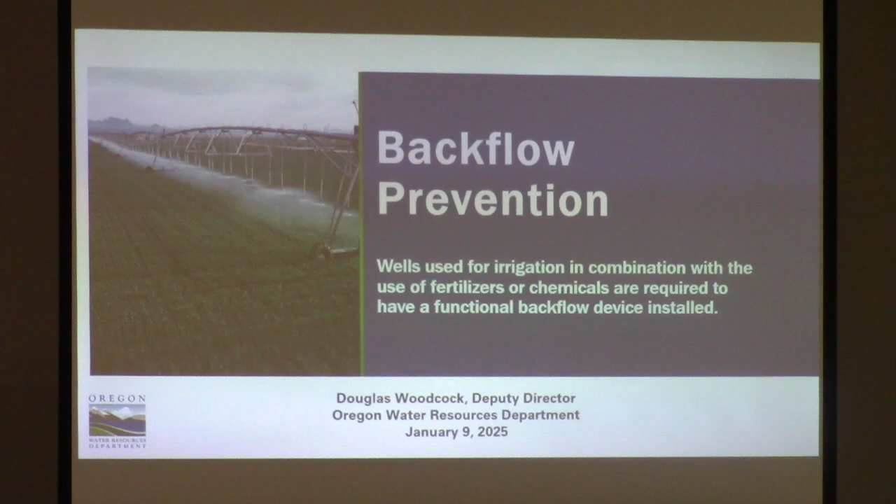We can add a few more. But this is for inspection.

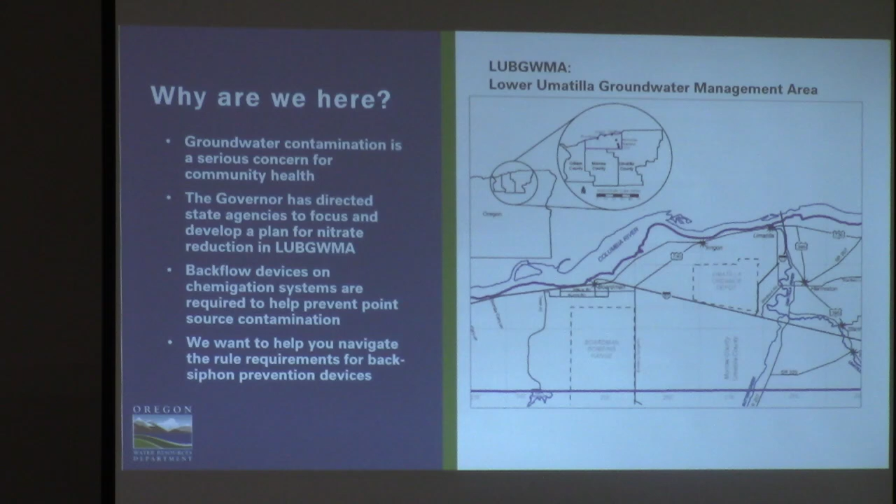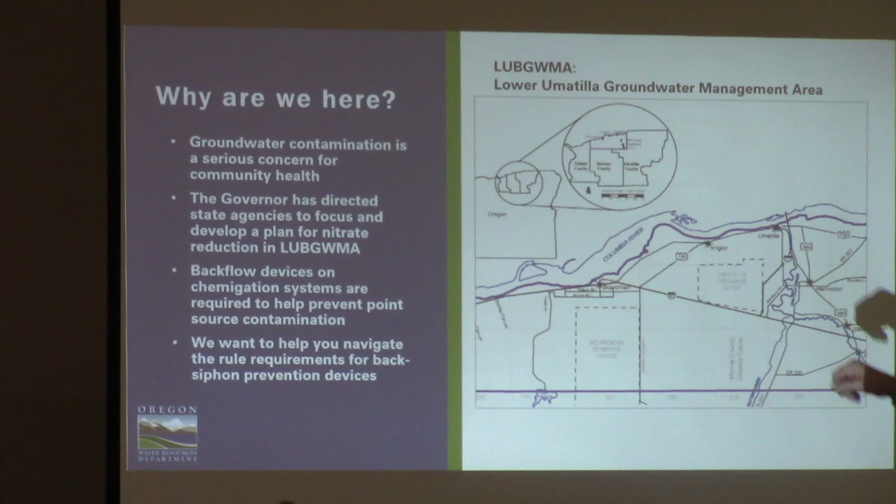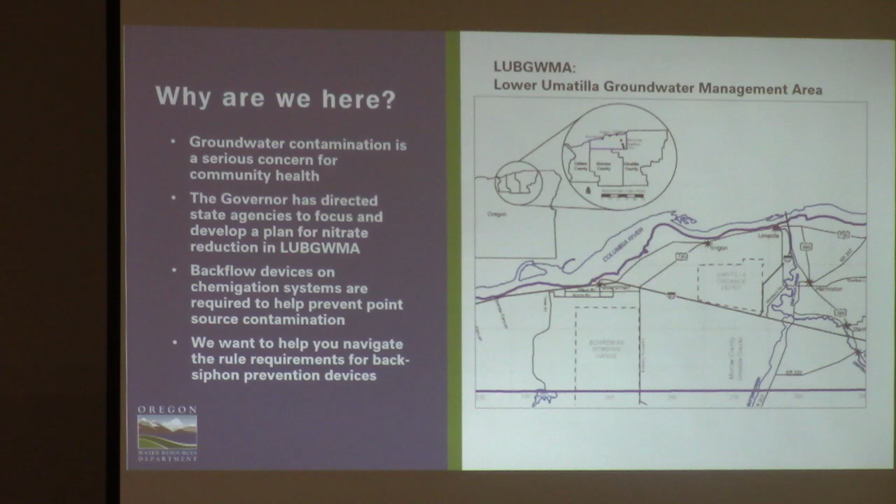So with that, we're going to figure out how to advance. So why are we here? This is the Lower Umatilla Basin groundwater management area, which you're all familiar with. There is a very, very bad groundwater contamination issue here, nitrate problems across the basin. The governor has directed state agencies to reduce nitrate contamination in the Lower Umatilla Basin. So DEQ, ODA, Water Resources Department, and Oregon Health Authority are all working together on this issue. We raised the issue of backflow prevention because wells that are hooked up to a chemigation system, where you're injecting chemicals into your irrigation line and applying that as you irrigate, have the potential of drawing those chemicals down the well when that well gets shut off.

And so there is a requirement that backflow prevention equipment be installed on the irrigation system to prevent that unintended movement of water back down the well. Now I'll say a little something right here. We had a gentleman and his son come in a little earlier and say, I irrigate from my domestic well and I don't chemigate, I don't inject any chemicals into my irrigation line, do I need backflow prevention? The answer is no, you don't. So if you're not chemigating, then this equipment is not necessary. I just want to get that out there right now. He thanked us, took a cookie, and left.

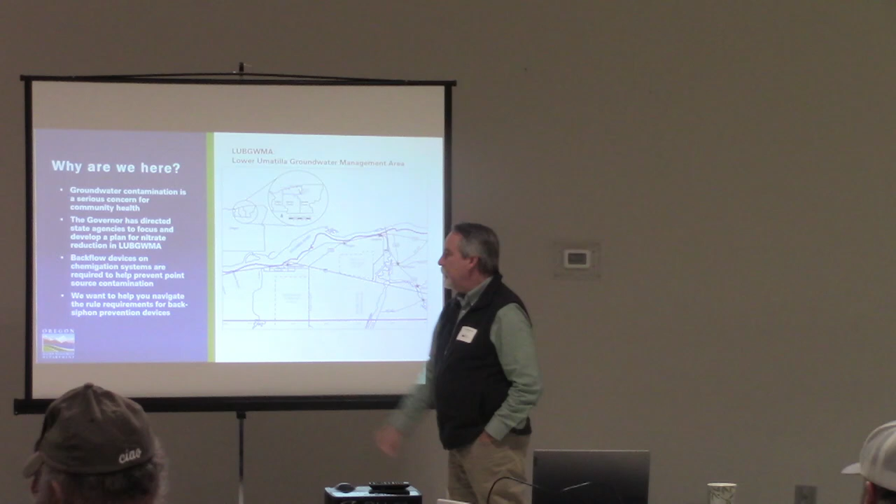So as I pointed out, backflow devices are required on chemigation systems. And lastly, while we're here, we want to help you navigate the rules, because I don't want anybody to have to sit down and decipher the Oregon Water Resources Department backflow device rules

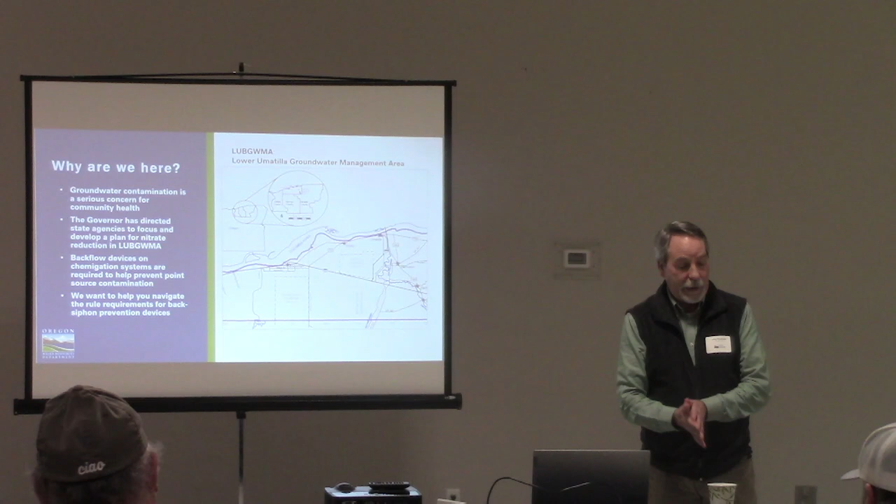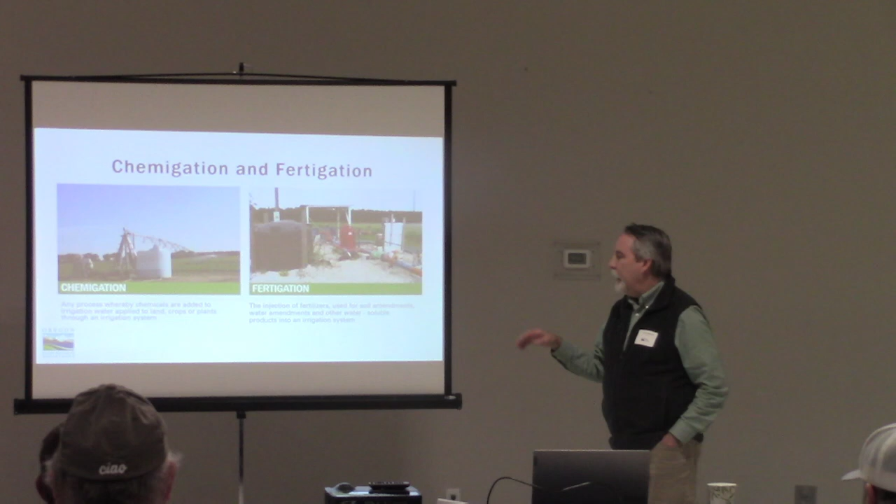and try to understand them cold, because they can be complicated. So with that, I want to define some terms for us here. You'll hear me bounce back and forth using the term chemigation and fertigation. Fertigation is kind of a subset of chemigation. Chemigation is injecting chemicals into your irrigation system, and fertigation is a more specialized term, where you're injecting fertilizers into your irrigation main line. I use them somewhat interchangeably, but chemigation is the more common term that I would use. So don't get hung up on the words too much there.

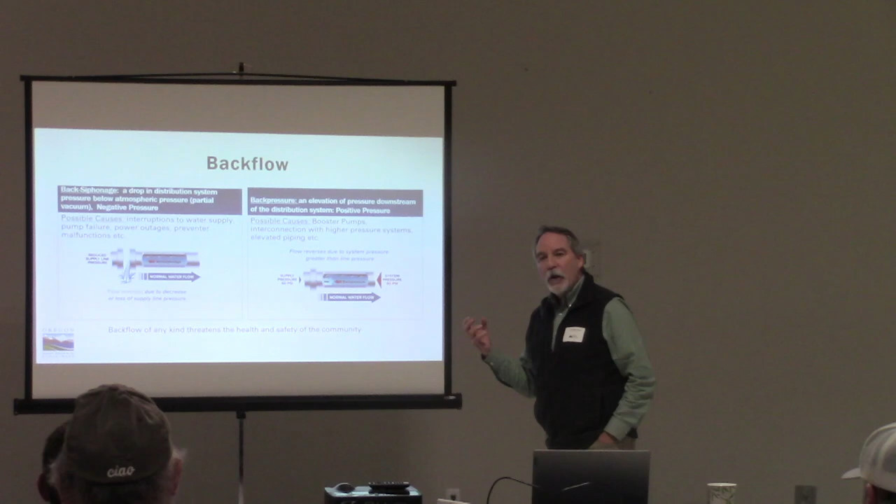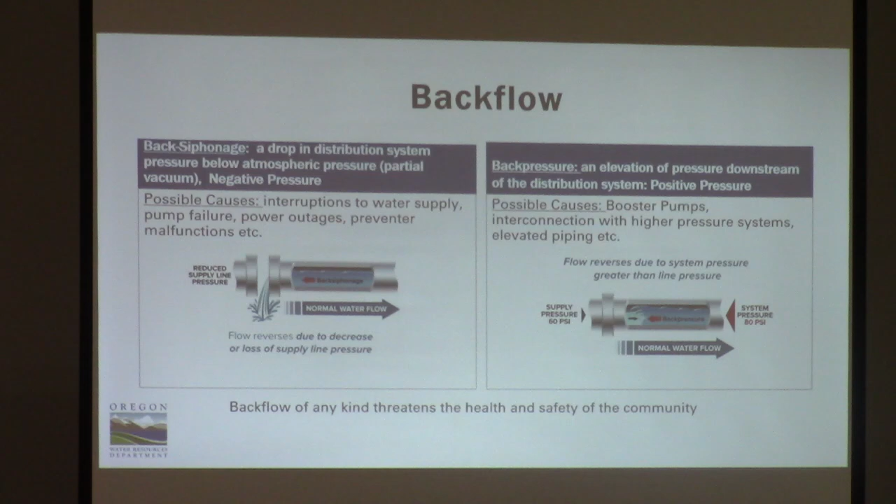Backflow is that unintended flow of water upstream through your irrigation system. So possible issues: back siphonage, that's where a siphon actually gets set up and it draws that water backwards in the irrigation system and then back down into the well itself. And there's equipment to help prevent that. And then back pressure. You could look at an elevation system where you've got more pressure at the end of your irrigation system than at your well, and it's pushing that water in the wrong direction.

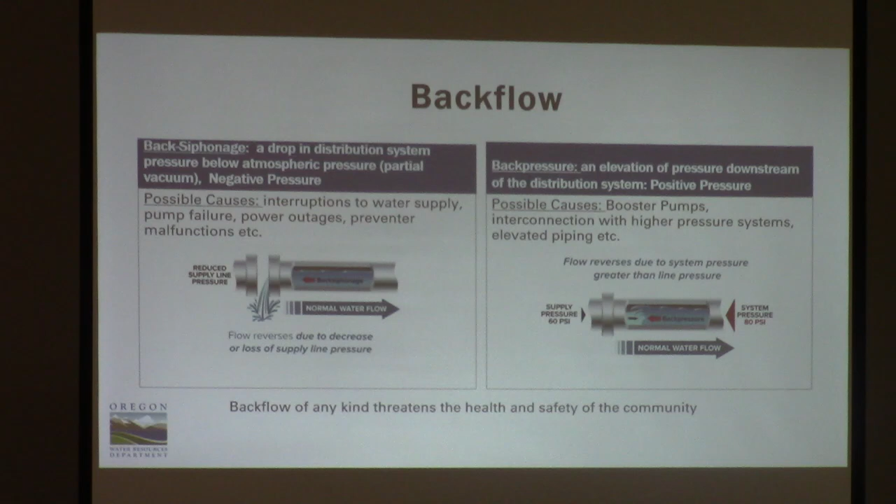Touch just a little bit on the law. So these rules have been on the books since the mid-1990s. A lot of people have this equipment on their wells, and many don't. We've taken some phone calls of late that indicate that some folks aren't aware of backflow prevention and don't have this equipment. So this is why we're here. We just want to be able to talk you through what the equipment is and why it's necessary.

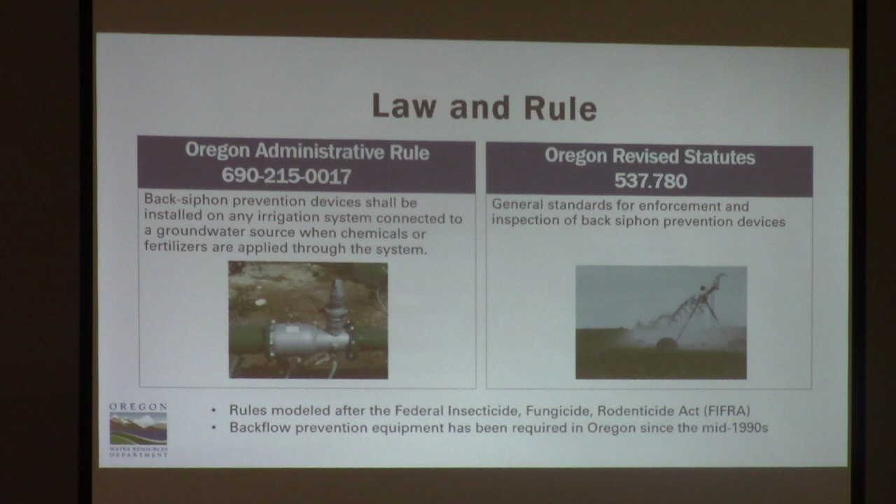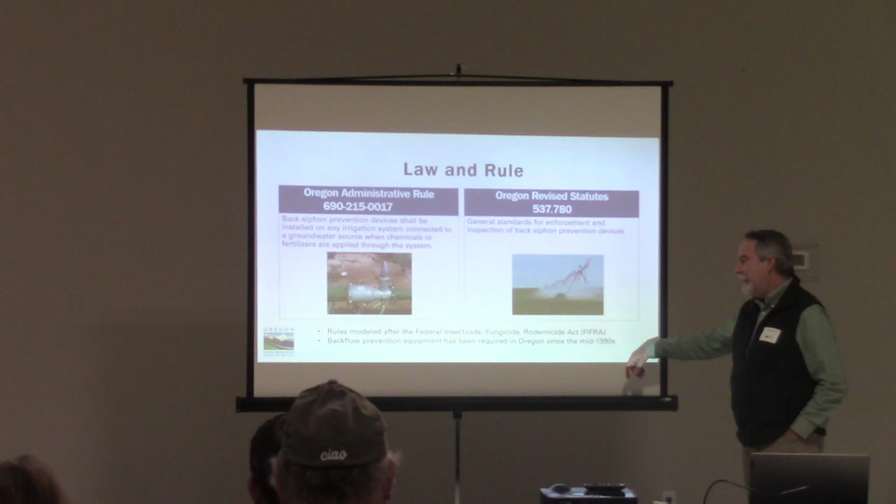I'll just touch on the left there: Oregon Administrative Rule says back siphon prevention devices shall be installed on any irrigation system connected to a groundwater source when chemicals or fertilizers are applied through the system. That rule is basically spelling out the authority provided under the revised statutes, and those are just general standards for the enforcement and inspection of back siphon prevention devices. These rules, by the way, were modeled after the Federal Insecticide, Fungicide, Rodenticide Act, some may have heard of it referred to as FIFRA. And like I mentioned, these rules have been in place since the mid-90s.

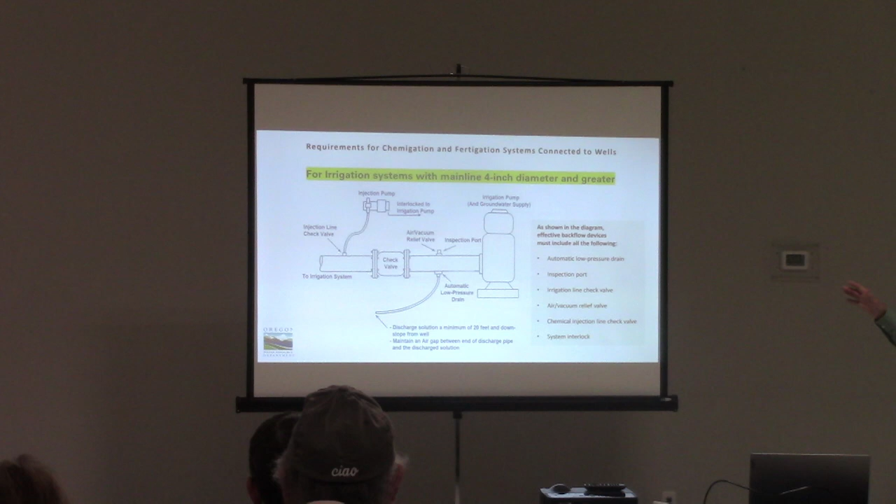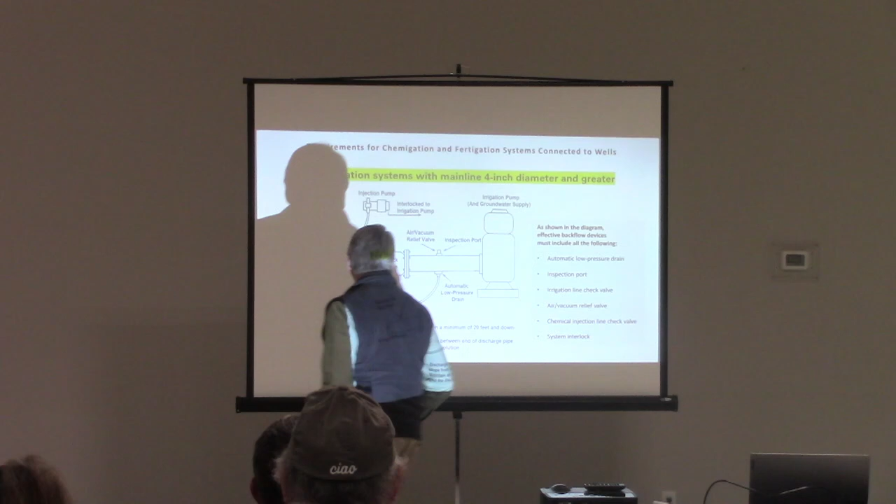This is a very, very simplified system. Many of the irrigation systems out there are much more complicated than this, but we're going to keep it simple for now. I'm going to start downstream, so here's the pump right here. Water is flowing this direction. So starting downstream, down at this end, the first thing we have is an injection line check valve.

That check valve is there to prevent the unintended movement of fluid one way or the other. You don't want your irrigation water flowing up through your injection pump and into your chemical tank. So that check valve prevents that movement of the water, and also prevents the unintended discharge of this chemical water in the event of a pump shutdown, so you don't have that drainage from the chemigation or injection pump into the irrigation main line.

And this has to be downstream of the next item, which is the check valve. Oh, first, I want to point out that up here with the injection pump, that needs to be interlocked. Here we say it's interlocked to the pump, so in the event that your groundwater supply pump shuts down abruptly, this automatically turns off. That interlock automatically shuts off that pump and prevents the continued injection of chemicals into the irrigation main line when you don't want it.

More complicated systems where you've got many wells, all manifolded together and then going out to multiple center pivots, may be a little different configuration than we've drawn here. Again, this is a simplified diagram to explain the different components of back siphon prevention. The next item upstream is the check valve. This just needs to be present for irrigation systems with a main line of 4 inches or greater. There's 2 different standards here; this is for the larger system.

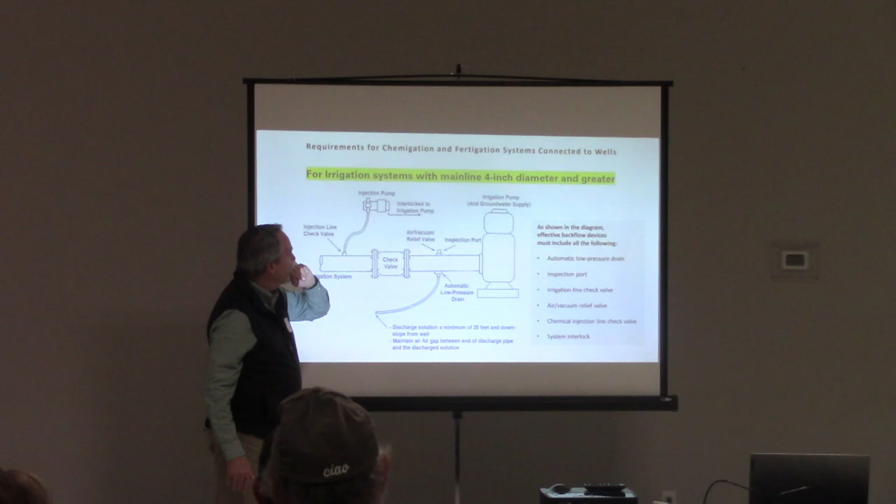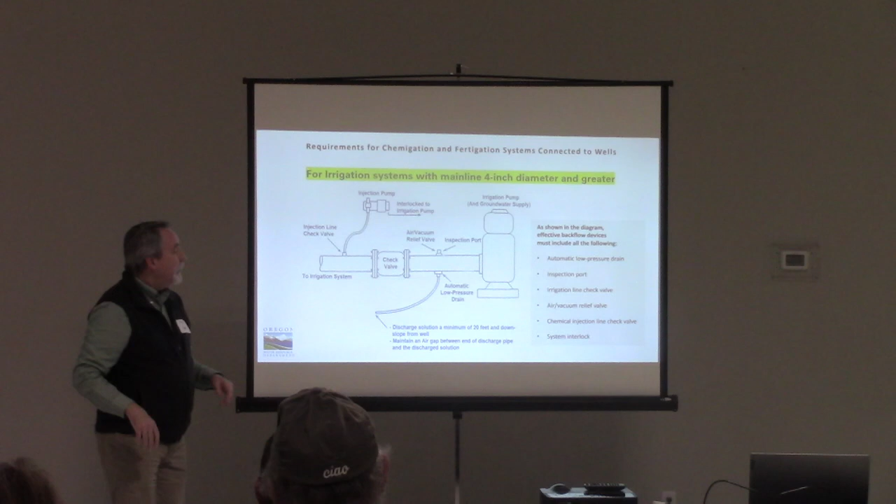There's an inspection port also. Some of you, if you had a chance to meet with the vendors back there, they've got some equipment that shows where that inspection port sits. That inspection port and air vacuum relief sits directly above the automatic low pressure drain.

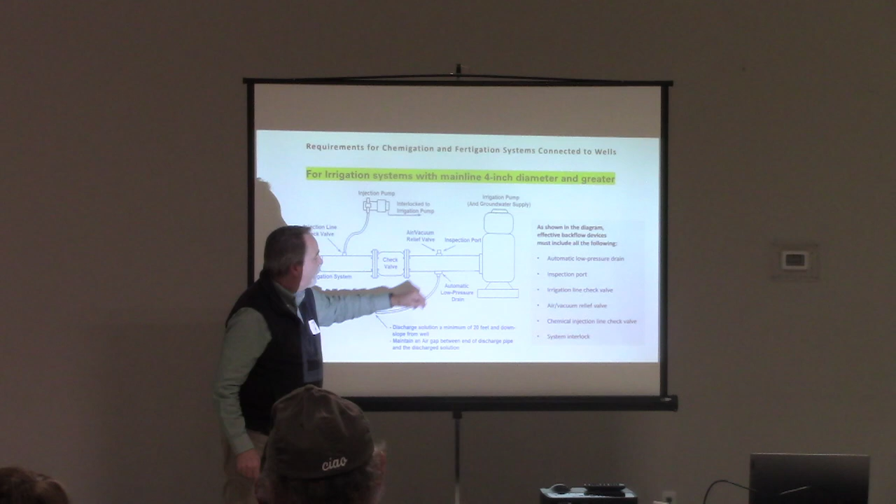Automatic low pressure drain is a valve that under pressure closes so that the water flows through the system. When the pressure is reduced, that valve opens up and allows the incidental water that is pooled up, because the pump is shut off, the valve is closed, there's still fluid in there, it's going to drain that fluid away before it flows back down the well.

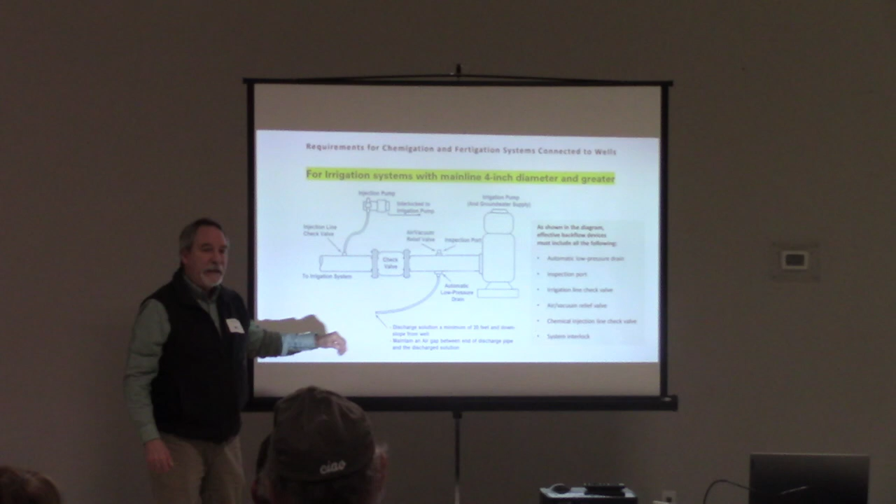Again, all of this is intended to prevent that contaminated or potentially contaminated water from flowing back down into the well. This automatic low pressure drain has a hose on it. That hose is supposed to run a minimum of 20 feet downhill away from your well, and it needs to have an air gap at the end so that if a vacuum is set up, there's no opportunity for this hose to act as a conduit for fluid to be drawn back up into the well.

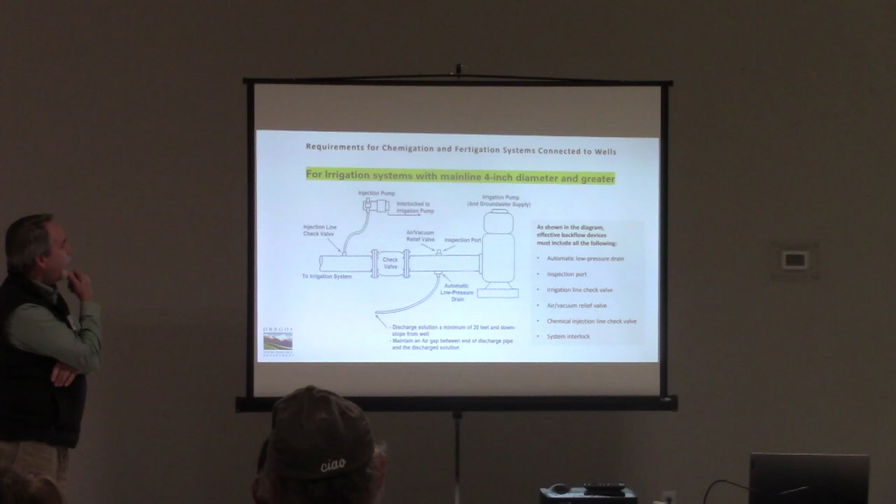I think that does it for this. I'm going to stop there and ask if anybody has a question before I show the next size of these.

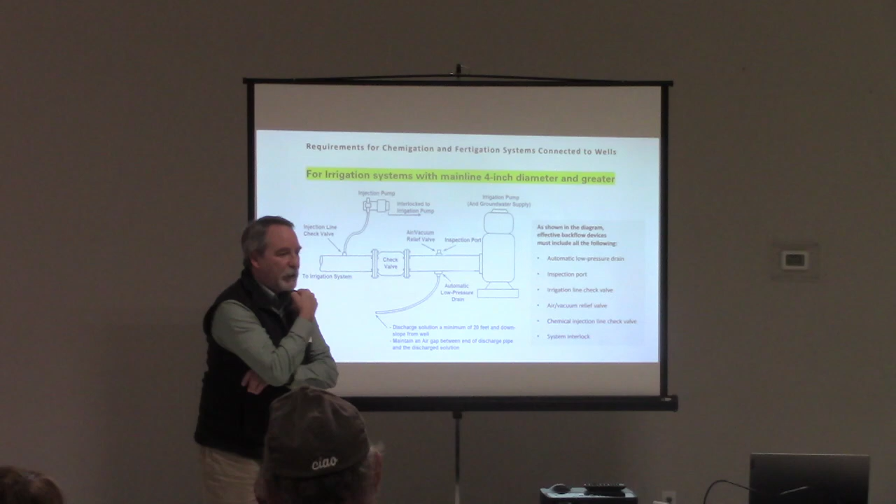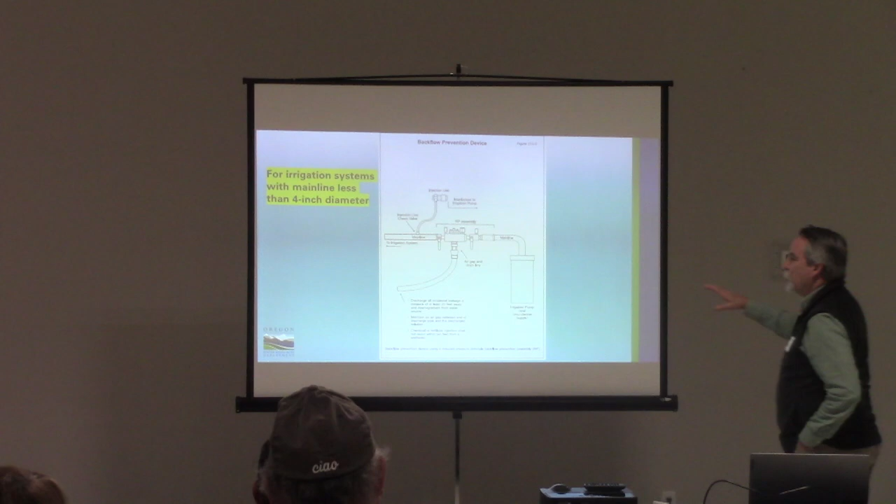So this is a system set up for 4 inches or larger. This is the requirement, I'm sorry, it's a little bit small, for irrigation systems with a main line of less than 4 inches.

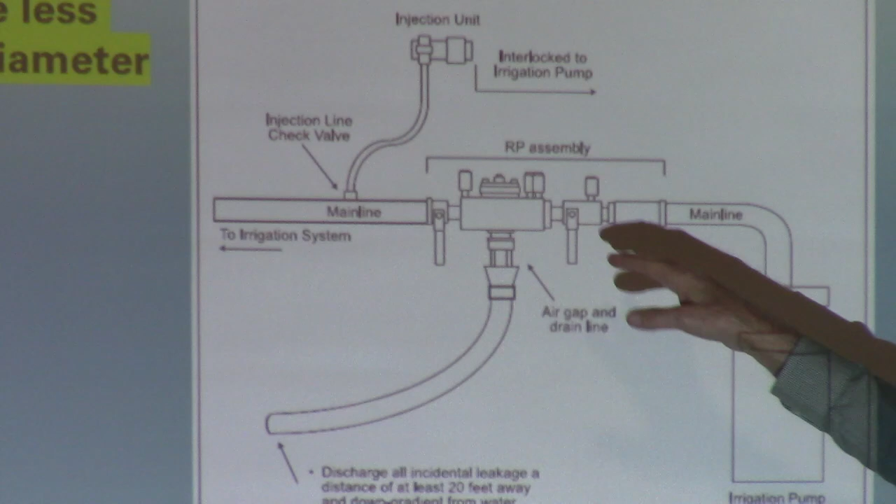All of the same components. Injection line, check valve, interlock to your pump. You've got your drain, your low pressure drain, and hose. But here, rather than a single check valve, the requirement is a double check valve called a reduced pressure assembly, an RP assembly. So it's just a little bit different to the system, but all of the same essential components are in it.

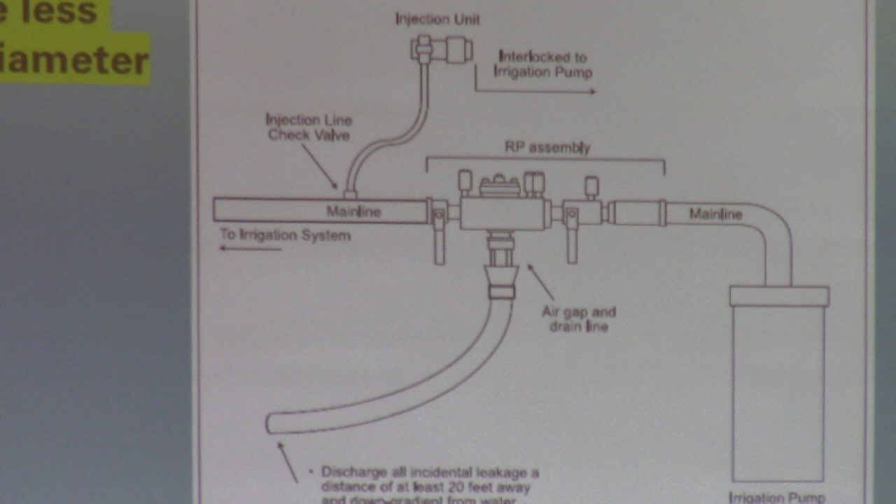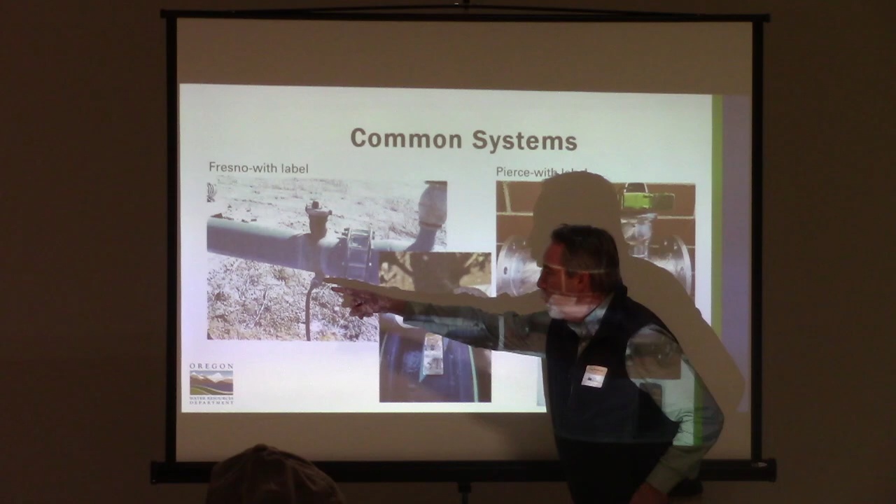On this side, we've got this happens to be a Pierce brand system, like you see on the back table there. We really like these because almost all of the components are in one device.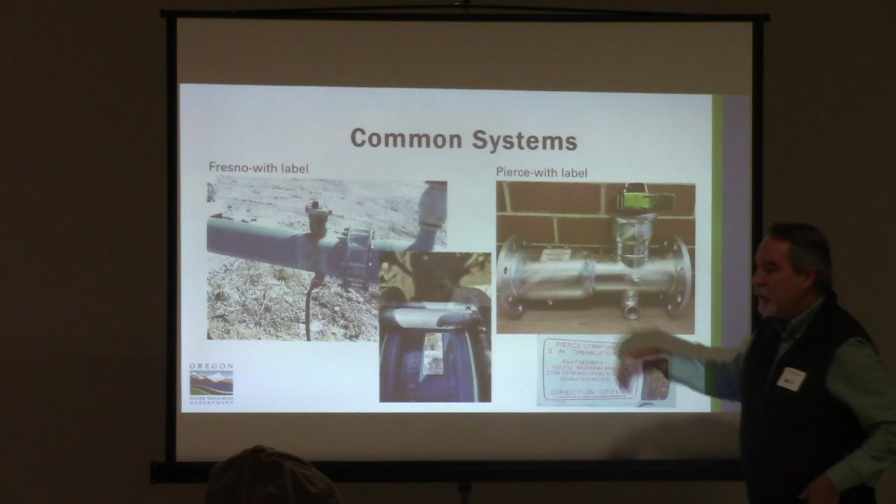You've got your air vacuum relief. You pop off that lock on top. You've got your inspection port directly over your low pressure drain right here. You can put a pressure gauge on if you need to right there. And you've got your check valve here. So it's just all in one system, and we approve of that design.

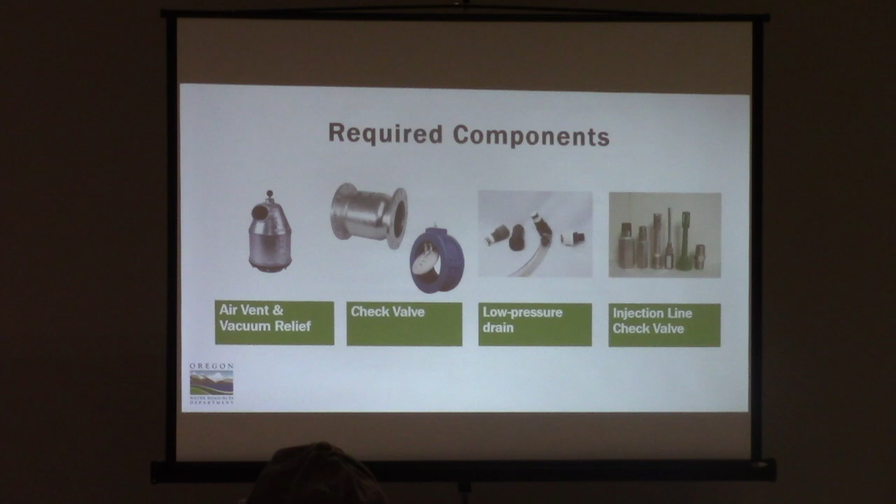Again, set components, air vacuum, got our check valves, got our low pressure drain here, and your injection line valves that I was pointing out.

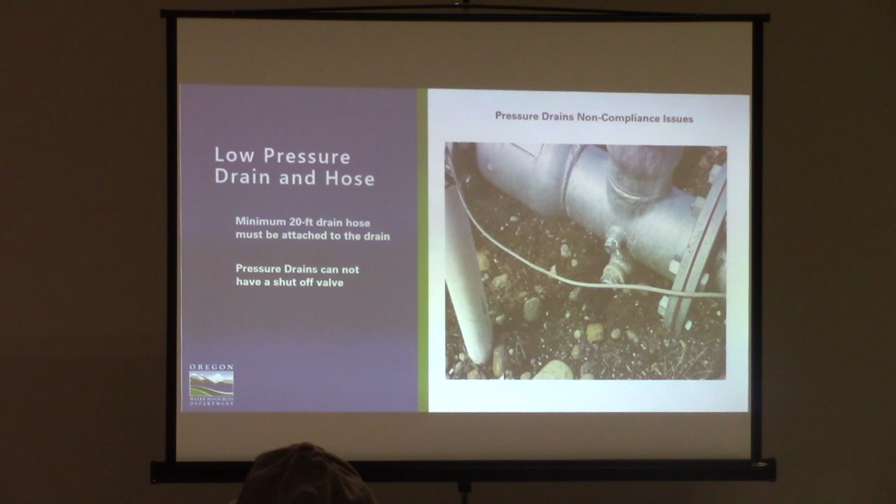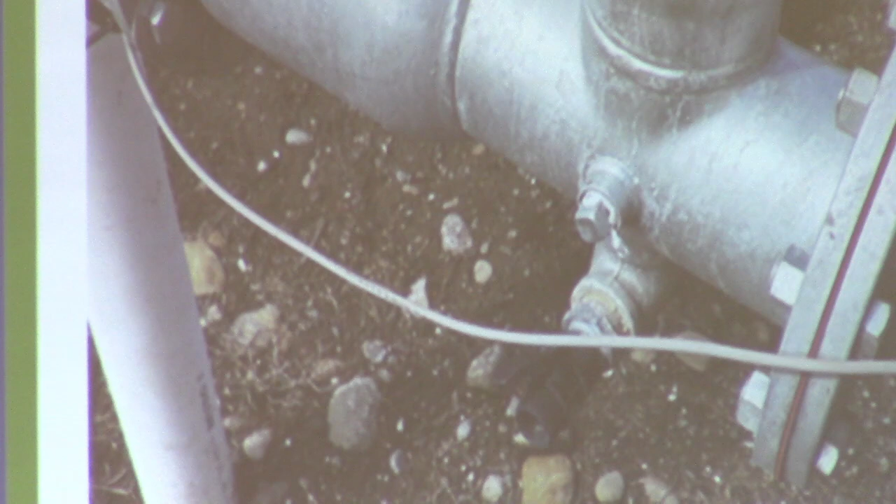This picture didn't come through quite like I had hoped, but this is a picture of the low pressure drain. It's got a couple of problems with it. One, there's no hose. You should have a hose that discharges that fluid away from your well. And secondly, you can't quite see it, but right on top of this nipple here, right on top, there's a handle.

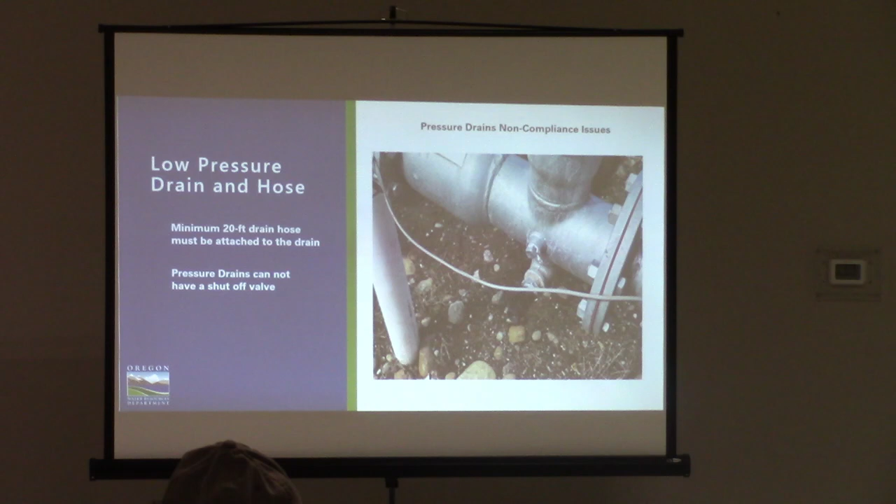It's a shutoff handle. And that's a requirement for the low pressure drain. You cannot have a shutoff anywhere along that line. Not on the valve itself, not anywhere along that discharge line.

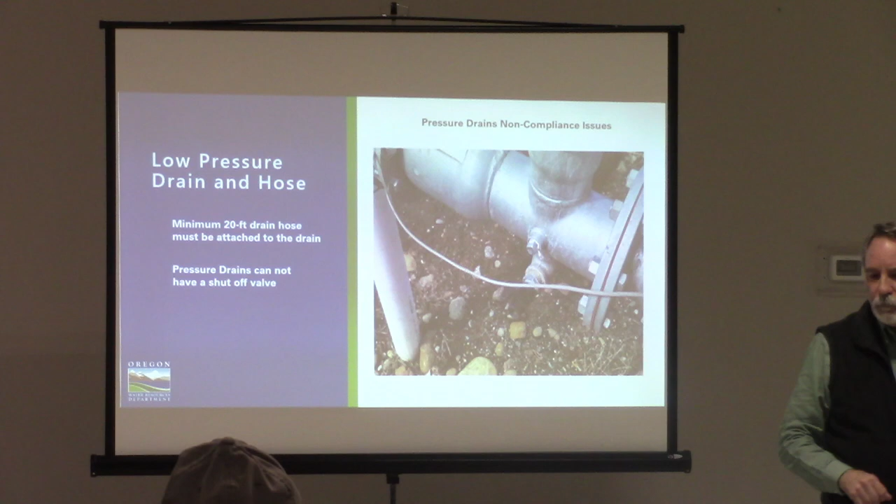So I want to talk just a moment here about our compliance inspections. As part of Water Resources Department's effort to work on nitrate reduction in the lower Umatilla Basin, we are going to be out meeting with people and inspecting to make sure that where chemigation is taking place, the proper equipment is in place.

So we'll be out looking at just the status of the chemigation. Is chemigation occurring or not? What equipment is there? Backflow system setup. And we'll be looking at the backflow and where it is relative to your pump. So we just want to make sure that we've got all the right equipment in the right place, and that equipment would be effective in preventing backflow down the well.

On the compliance piece, we go out there and if you've got all the equipment in place and everything looks good, no further action is taken. Everything stops right there. When we get out and see that the equipment is not there or it's not in proper working order...

we're going to try to meet with the owner or the operator and let them know that equipment needs to be replaced or installed. If there is a refusal or a lack of compliance, we will pursue enforcement. That would be a notice of violation and a notice of assessment, which basically leads to civil penalties. We don't want to go there. We're hoping that when we meet with the landowner and they recognize they don't have the appropriate equipment, that equipment will be installed.

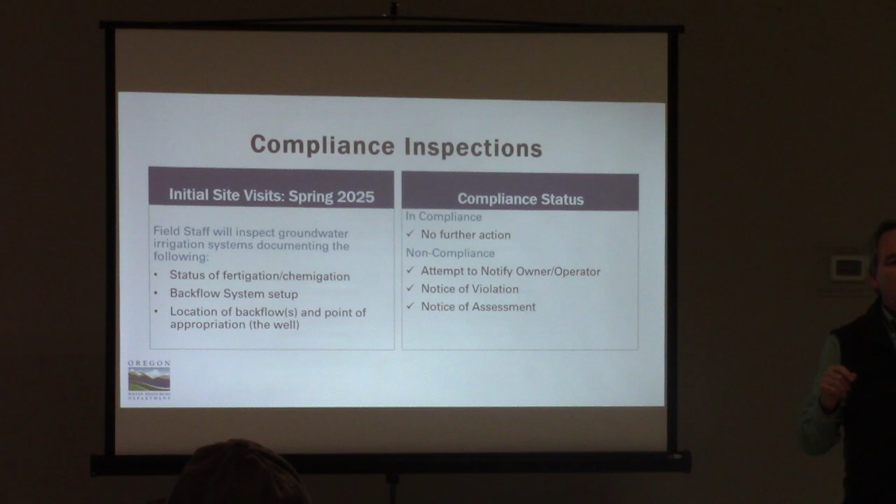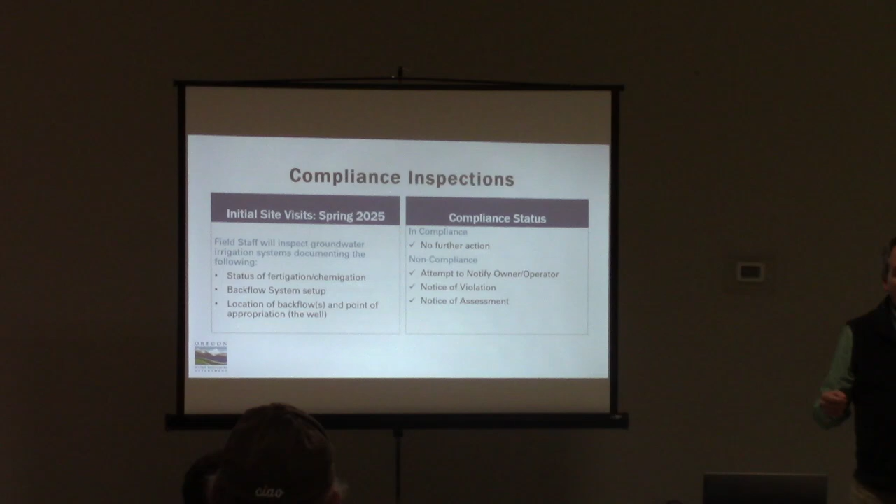One other important point: the way the rules are structured, if you are chemigating and you don't have the proper back siphon prevention equipment in place, then you are out of compliance. To be in compliance, you disconnect the chemigation. You just stop fertilizing through your system at that point, and that buys time for the landowner or operator to get the appropriate equipment in place.

If we come out and say you don't have the equipment in place, would you please disconnect your chemigation, and you do, we're done. Don't hook it back up until you get this stuff in place, but that gives you the opportunity to get one of those Pierce devices installed and make sure you've got the proper equipment for back siphon prevention. That's how our staff will address this when they see that you or the landowner doesn't have the right equipment. They'll ask you just to stop chemigating, and as far as we're concerned, you're in compliance.

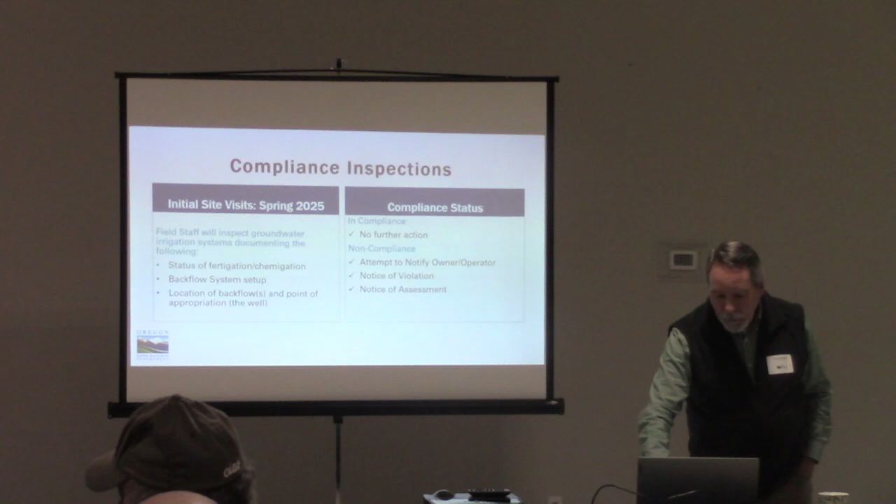I want to share with you just a few resources. I hope you noticed on the table when you first came in, we had some copies of documents. The first one listed is 'Chemigation in the Pacific Northwest.' There is a lot of good information in this document. It's more than just the back siphon prevention equipment—it also talks about the appropriate ways to calculate your chemigation so you're getting the right application of chemicals.

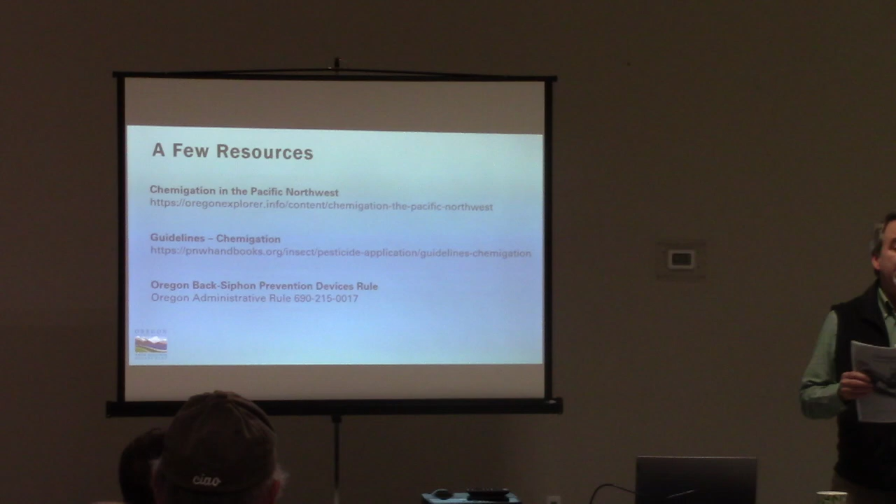The lead author happened to be on the Rules Advisory Committee in the mid-90s when the Oregon Water Resources Department back siphon prevention rules were adopted, and really provided a lot of help in developing those rules. We've got another document here, guidelines to chemigation, with a lot of good information in it.

And then lastly, we also made copies of the rules if anybody wants to sit down and spend some time looking at what the requirements are. So with that, I think let's take some questions. I encourage staff to help me out here as we get questions, and we'll take any questions that we have.

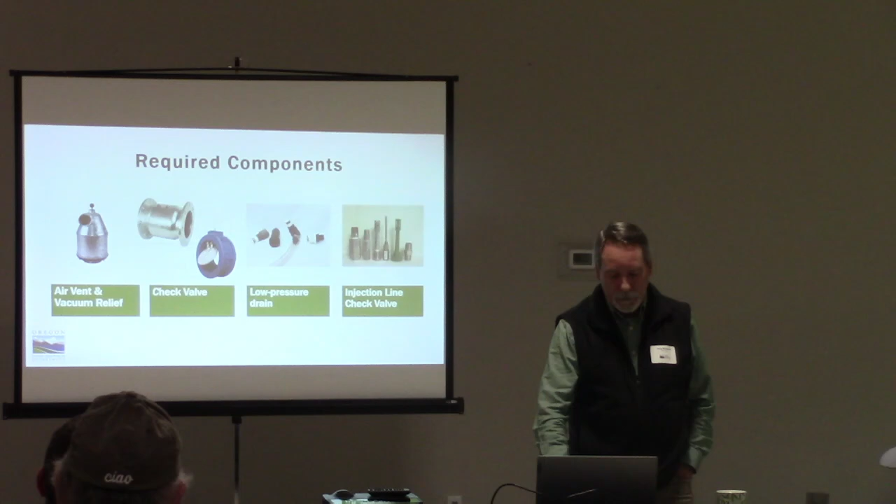Question: So in your large system, what constitutes an inspection? In the large system, as we have it described here, going back to the picture: the inspection port is required so you can make sure that you don't have incidental fluids and that there's proper drainage. It's got to be accessed above that low pressure drain. Question: So is a 1-inch port sufficient, or a 2-inch, or does it have to be 4-inch disconnect, or what constitutes an inspection port? Answer: It's a minimum of a 4-inch access port.

Unless it has written approval from the department. Oh, that's something else I didn't point out.

I did mention that some of these irrigation systems can be pretty complicated, and you can't just get a one-size-fits-all to address all of the backflow prevention requirements. So the director of the department can approve alternate systems, but it requires that you actually reach out to the department and get that approval.

So I think, Sean, correct me, it's got to be in writing? Yeah, the rule says written approval by the department.

If you're just going to grab one of those Pierce systems like our vendor friends have here, those are going to be installed and approved. That's not a problem. But if you're going to do something alternative, contact the department. I don't want you making a big investment in equipment and finding out it's not really meeting the standard. So please reach out to us.

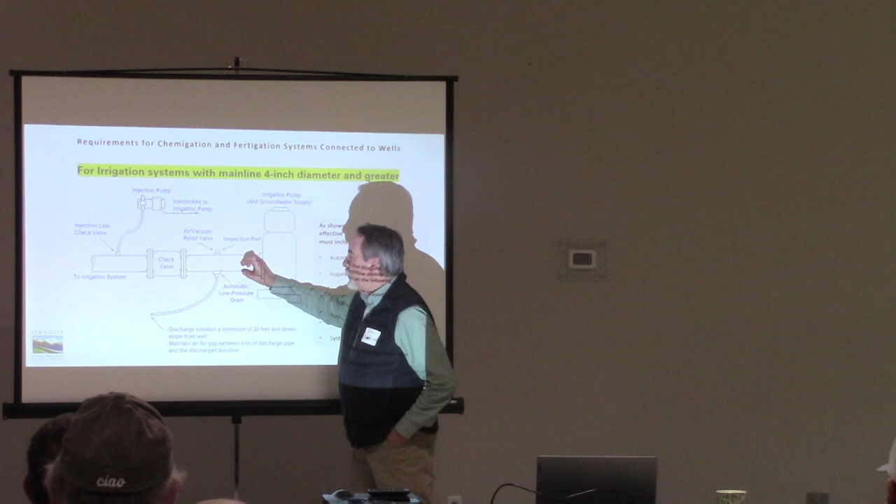This is, we have an automatic low pressure drain here, and that is to essentially eliminate any incidental fluids that are in the pipe behind the check valve.

But it's gonna go down the well. The incidental fluids would go down the well? Yes, they would. So why do you have a drain? You have a drain there because this is potentially contaminated water that you have here. Some water can get past this check valve.

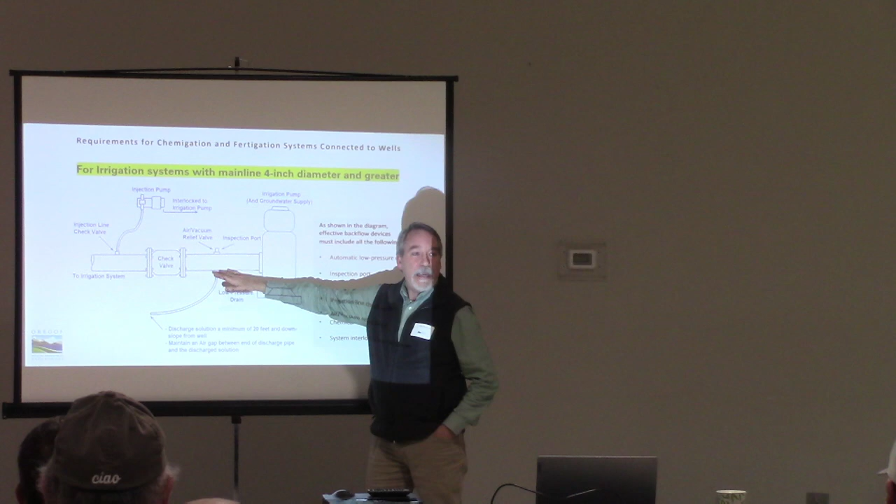When the turbine shuts off, you're going to get flow back down the well. That is correct. But there's going to be some that's captured by this drain and shunted away. So that fluid doesn't go down the well. We're probably talking cups.

Probably cups. You know how many of those I've seen that have been plugged? No, how many? Almost all of them. Because they leak, they don't work. So if you put a cup in for a Fresno check valve up front, all I would have to do is roll a 4-inch coupler on it and put an air vent on it.

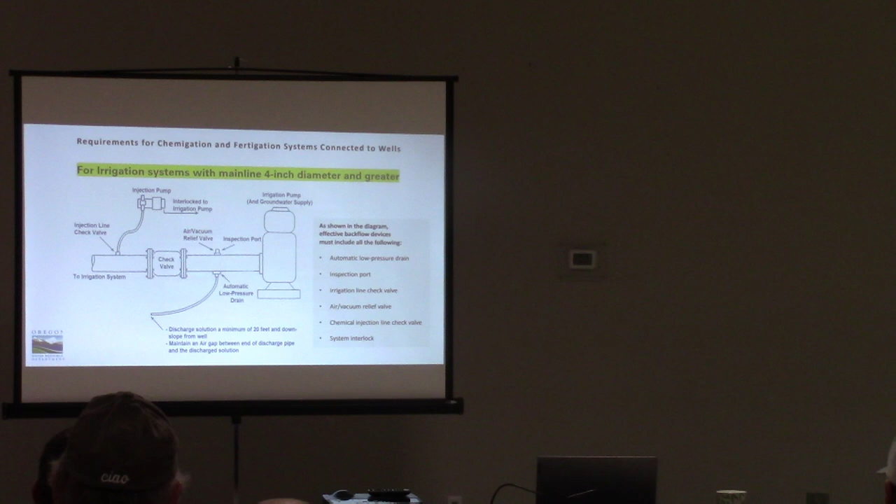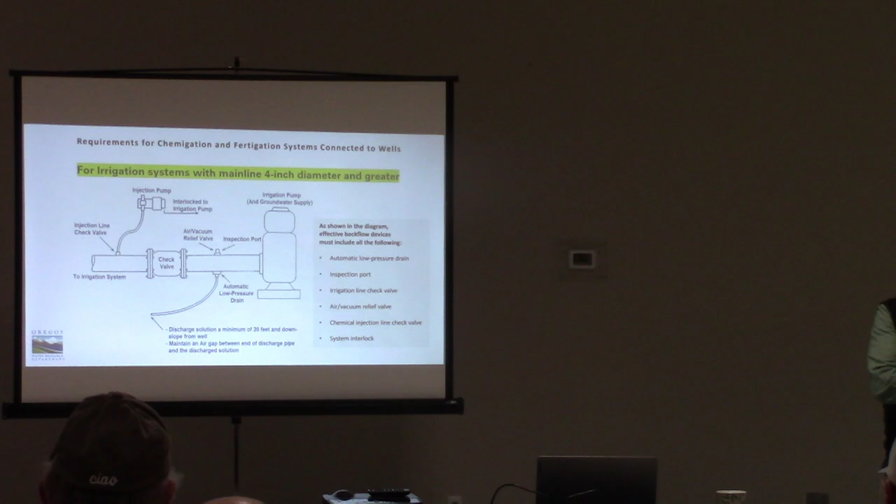So you're saying you don't need the automatic low pressure drain? I guarantee you, once you guys check it, it's gonna get plugged. Once you get the check in, the low pressure drain gets plugged. Low pressure drain is not to be plugged. It's not gonna sit there and leak all over their pump station.

This equipment is not a one and done. I think we agree with that. You put this stuff in, it's gotta be maintained. It's gotta be inspected. You gotta check this stuff.

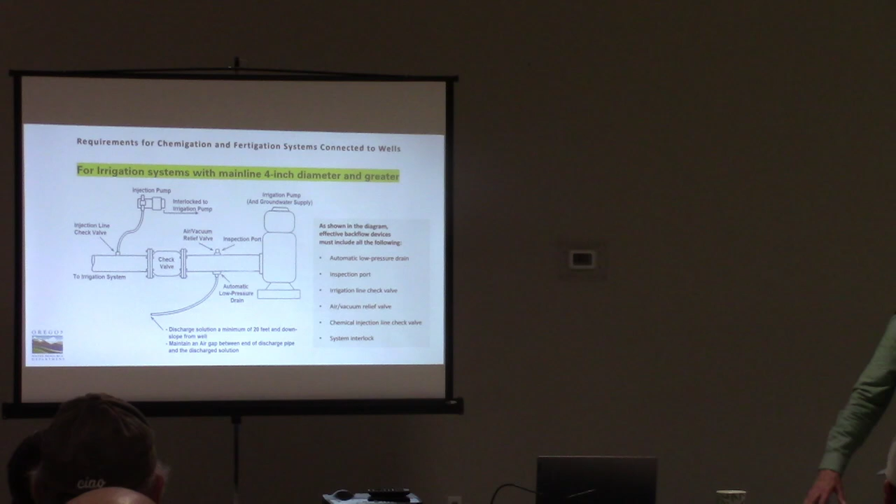Interesting, when we first started developing this outreach program, I reached out to some of the growers and said, hey, we're doing this, we're going to set this up, we're going to start inspecting these. And a couple of pretty good-sized local growers said, you're going to find that most people have these things in place. Some don't. But many of these are going to need to be replaced or updated.

And that kind of falls into your category, I think, that you're pointing out. This equipment can get installed, but it's got to be maintained. So if you've got a plugged drain valve, then that's going to have to be replaced.

I think what you're trying to say is those are problematic because they collect all the rust out along the pipe, and that inhibits correct operation. They tend to leak constantly when the well's in operation, which is why you'll find that when we feed it, probably just the same as you saw that there was a hand valve that was installed.

Yeah, it's exactly, they can be very problematic. That's helpful. Is it rust that typically clogs those? Yes, rust, calcium, sand, rocks that come through your well, debris, all of it.

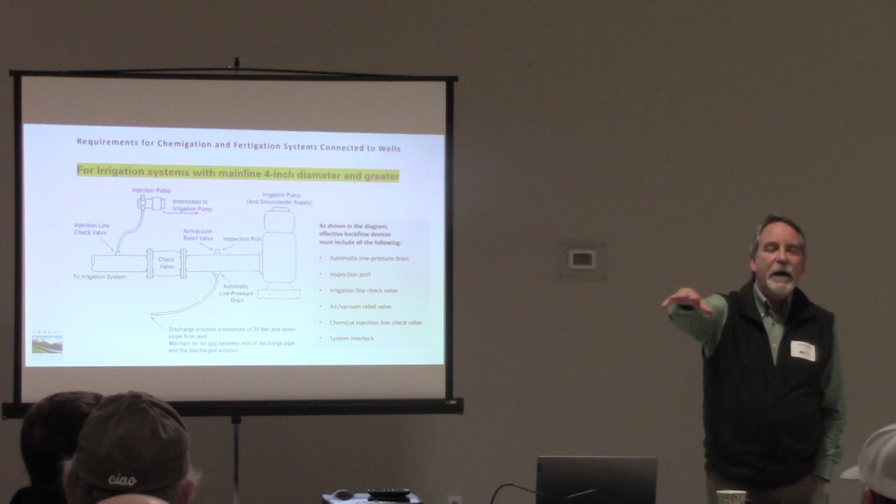Can everybody hear that? Did you hear that okay? Okay, just want to make sure.

Yes sir, on the inspection part of it, is that something that you guys do, or is that going to be for contractors, like water level measurement, the whole thing? Right now, the way that the rules that are in place say, the owner-operator is responsible for inspecting the equipment each year before chemigation begins. So the owner-operator takes a look at that, makes sure it's working. We will be out and inspecting as well.

We have looked at chemigation around the state in individual cases. Our biggest effort in chemigation was really down in southwest Oregon, where we had this huge bloom, no pun intended, of cannabis that was just really growing everywhere. People were taking their domestic wells and injecting chemicals into the irrigation lines, fertilizing their crops with them. So we were working with them to make sure they had backflow prevention on those to protect that drinking water supply. We have not done the type of focused look at backflow prevention like we're telling you we're doing today here in the lower Umatilla Basin.

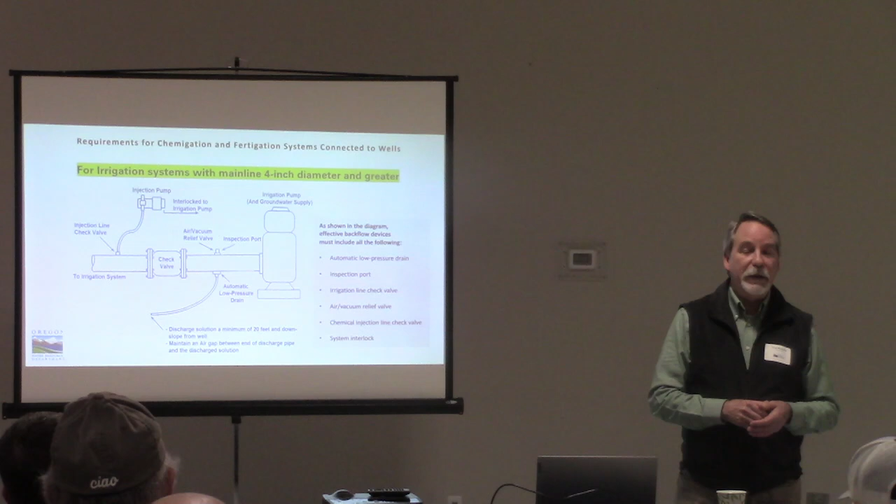So we're going to be out, we're going to be looking at these. The first thing we're going to do is just make sure the equipment is in place. We will develop some sort of inspection program down the road. But right now, this year, before the 2025 chemigation or irrigation season starts, if you're going to be chemigating, get the equipment inspected, get the equipment installed, make sure everything is functional for 2025. And we'll be reaching out to folks to come out and see if the equipment is in place.

Yes sir, do you have a list of either approved devices or specifications for your automatic low pressure drain? As far as how big it has to be, or the pressure at which it seals, or a standard? Sean, do you recall what the pressure says, or what the size? It's 1 PSI, that's when it needs to trigger, but in terms of the size, it's just a 3/4 inch diameter. Okay, so 3/4 inch. I don't know that we have a list of manufacturers. Yeah, there's several you can find online. They're about $20 to replace one of those. You can shop around at different ones.

Or contact the ones that we have, like Pierce. They actually had some of these on Pierce's website. Well, that's a helpful point. I'm glad you raised that about the low pressure drain, because it sounds like that can be problematic, and that's something we can pay attention to when we come out and look at those things.

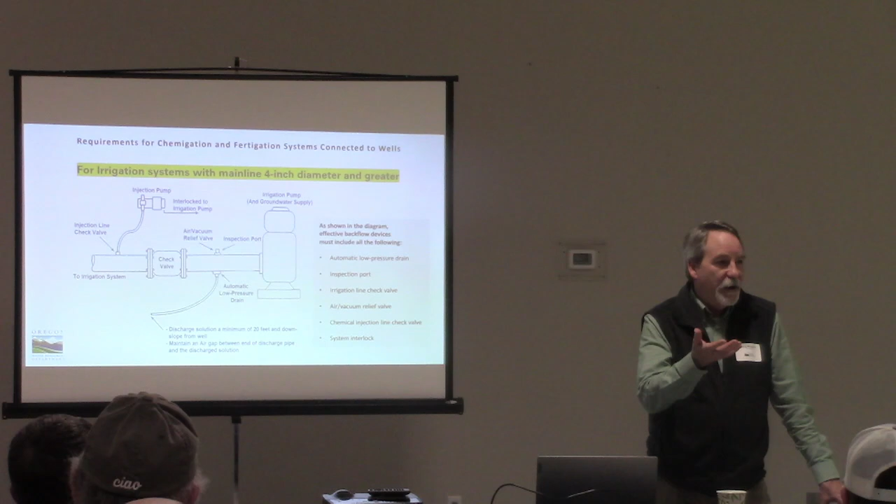You're only requiring this on wells, you're not requiring this on ditch. That is correct. What about sumps? The rules we're talking about are groundwater related. So if your sump is just an excavation in the earth that has groundwater seeping into the bottom of it, that would constitute a well, and so that would fall under this as well. I said well twice, didn't I?

So back to your inspection port, did it need to be a 4-inch coupler? Yes. And reduced down to a 2-inch air vent? I think so, yeah, as long as you can see the check valve from the inspection port. Right, so it could be a Fresno or a Tuscan check valve, or another check valve, wafer check. Oh, wafer check, as long as it also has that air vacuum relief valve.

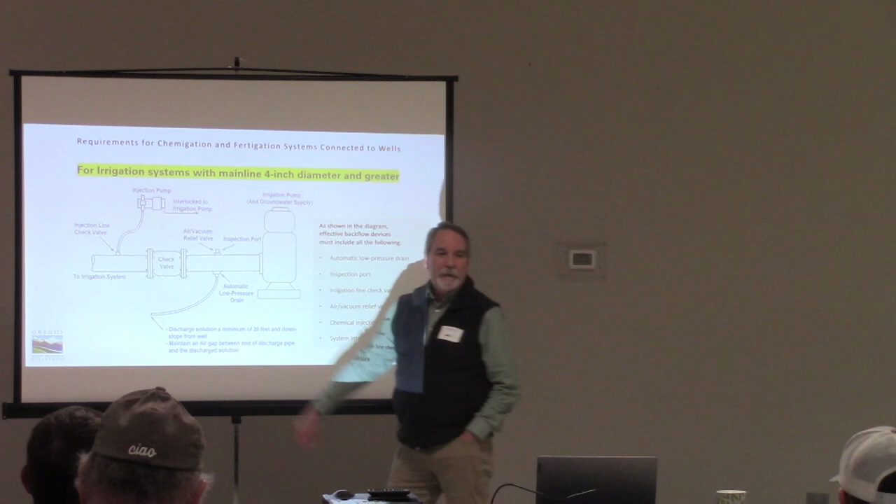Well, with it, most of them have that. I mean, 90% of your wells already have a check valve, or 100% have a check valve, because number one, they're on multiple systems, and that farmer's gonna know if that check valve's not working, and he's losing water, he's not gonna like it. So he's gonna have that check valve inspected and shut off. When that turbine shuts down, all that air vent really does is release air back down into that turbine to let the water stream out.

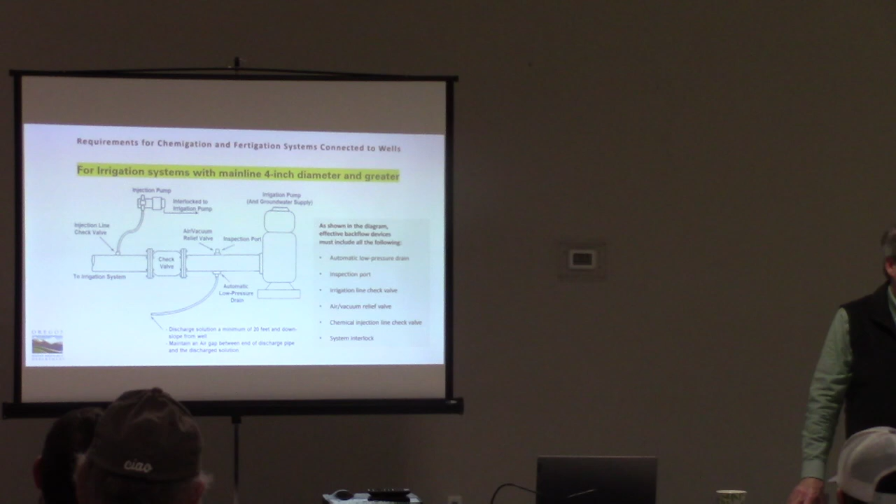Sumps are different. On a centrifugal system, you're not gonna find anybody that's gonna put a drain on the bottom, like on a sump or anything like that, or even on a 20-foot well, because they want it to keep prime. So I'm just saying, once you guys inspect everything, and I already talked to you, there's no incentive to any farmer.

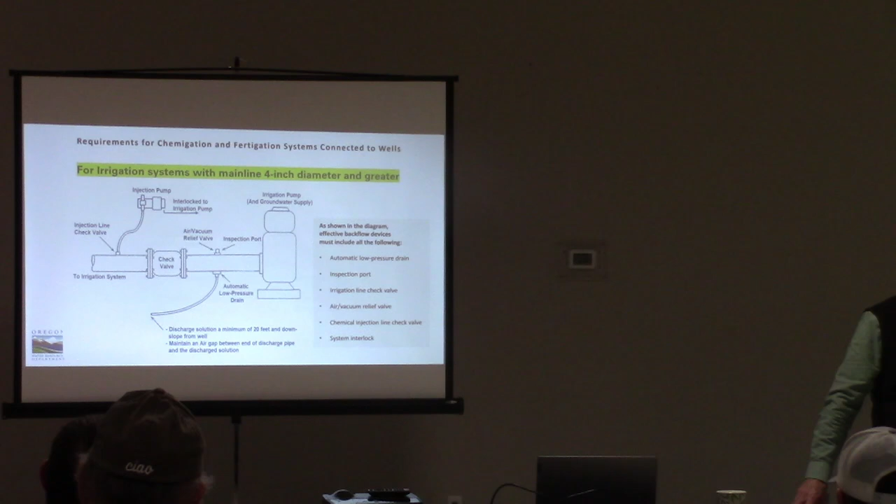It's not that these guys caused it, but now they've got to pay for it. And there's no incentive, so once you leave, that drain's gonna get plugged again. They just spent a bunch of money for someone to weld a coupler on, and those Pierce irrigation valves wear out. They're very expensive, and they don't go up to 14 or 16 inch. So what do you do then?

Well, in these situations that aren't straightforward, where you can't just buy something off the shelf, I want to work with you, and with people who are knowledgeable about this, to find equipment that will be effective in preventing the backflow.

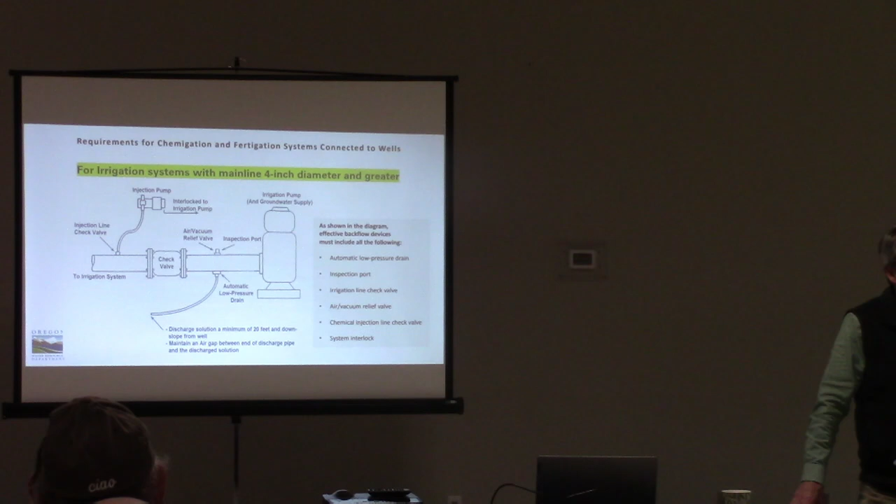Another question for you. In the paperwork we received, there was a question about when the backflow system was last tested. What is the test requirement? Is that different than just a regular inspection? Right now, as the rules point out, the landowner or operator is responsible for inspecting and testing the device.

From what we have available to us right now - and again, I'm not an expert on these things - your inspection port allows you to get in there, probably with a mirror. When I look at those, I have a hard time seeing that check valve, but I think with a mirror and a flashlight you could see that the check valve is closed and appears to be in good repair. I think that constitutes inspection.

And maybe you take a look at that low pressure drain or something like that, checking the equipment to confirm you've got that interlock on your system. This doesn't need to be third-party certified. At this time, no.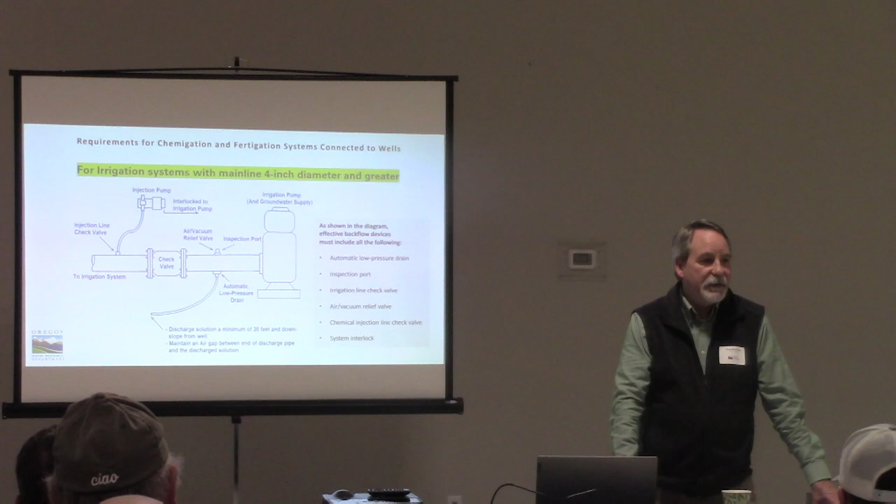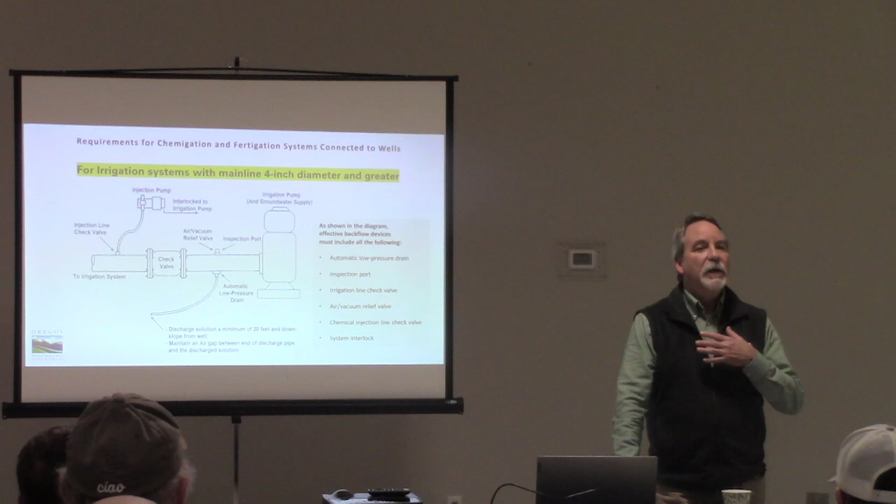What about smaller diameter RPs - do they have to be tested mechanically? Smaller RPs do, and I know municipal systems, when you're hooked up to one with a landscape irrigation system, require those things to be tested annually by a third party. We do not have that requirement. Sean, correct me if I'm wrong, we do not require certified testing on the RPs. All of our well inspectors get that training, but we don't require it ourselves, no.

That's a good point - like if you had a 3-inch line with an RP on it, you don't have to have it tested by a backflow certifier. Yes, our rules do not require that. That's true, but I would note that the director can require it. That is true, yes. And I wanted to check in with this gentleman - you had your hand up for a moment.

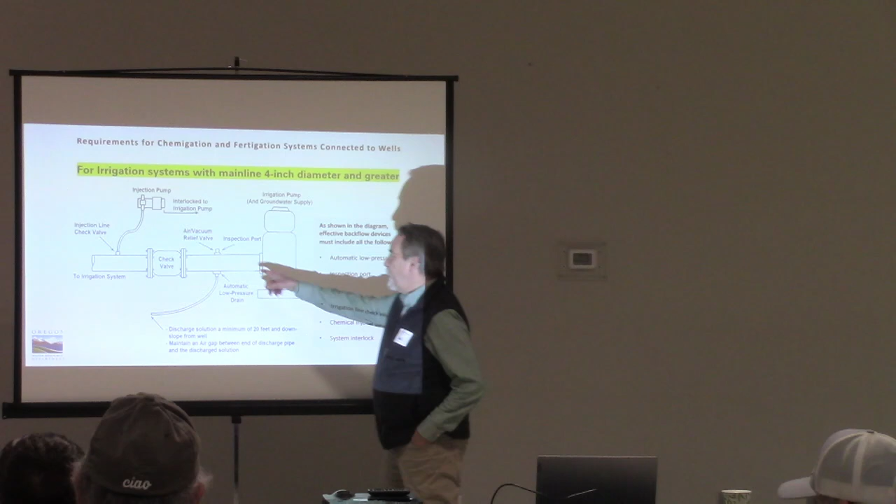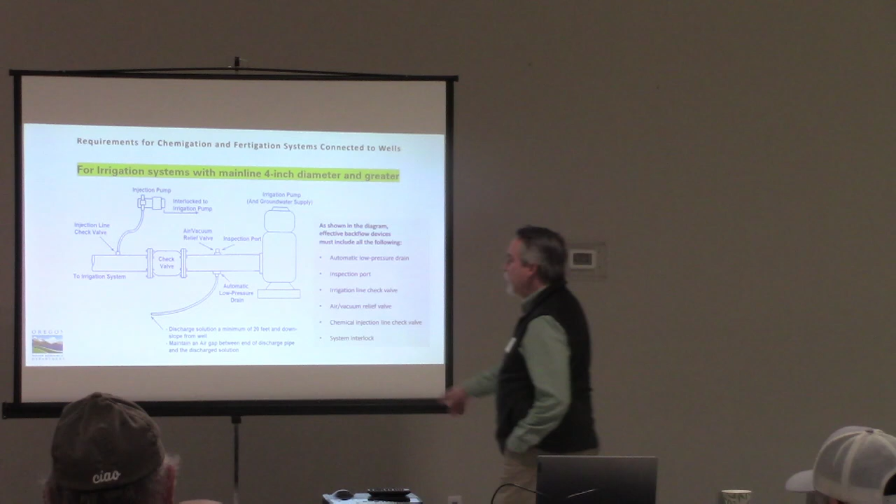I would look to some of our irrigation specialists here - does that make sense? I thought it was that big so you could put your hand in and actually physically move it in and out. They want 4 inches on top for inspection, and only 3/4 inch on the bottom. Yeah, 4-inch on top up here, and just 3/4 down here.

Any other questions? Are there any changes? This is an old standard that we're just now getting around to enforcing. Is there anything as far as change coming down the pipe we should be aware of as we're evaluating our systems?

There is nothing in the works right now that I would point to that we see on the horizon. However, this is going to be very educational as we get out and visit all of these different farms and look at the different systems. Depending upon what we find, it could result in the department coming back and changing some of the rules to make things a little more clear.

You asked about a third-party inspection program. Does that end up being in the works? I don't know. Did it make it into this required design as a 20-foot grade? Could be problematic in a lot of installations. You may not have elevation to get drainage slope. Realistically, having a sealed wellhead or having some kind of lack of continuity to the wellhead might be a more realistic approach.

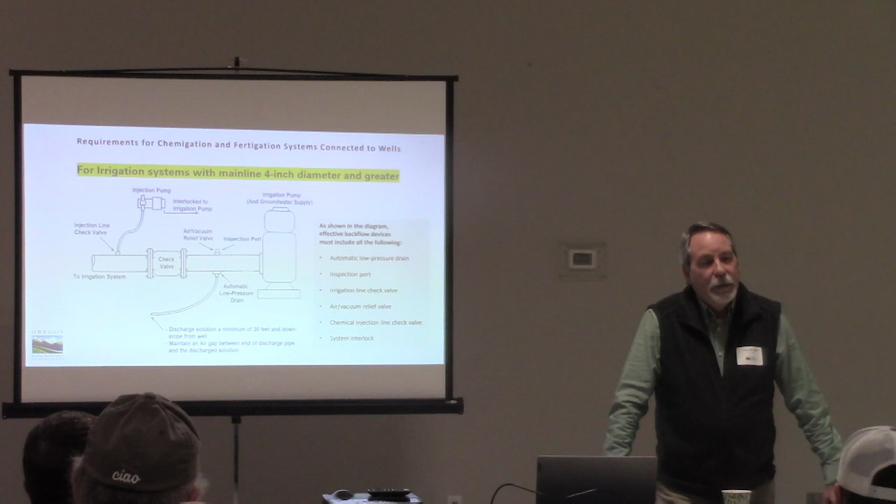Yes, sir. You said you're going to come inspect. Are you going to give the landowners advance notice? Are you going to call, or are you just going to show up on their property and they see you out there? We're going to make an attempt to meet, connect with the landowner before we come out. Because some of these systems, quite frankly, are complicated, and it would really help if we had somebody there to show us, here's my well, and these are the 3 pivots over there that are being serviced by this well. It would just be a lot easier.

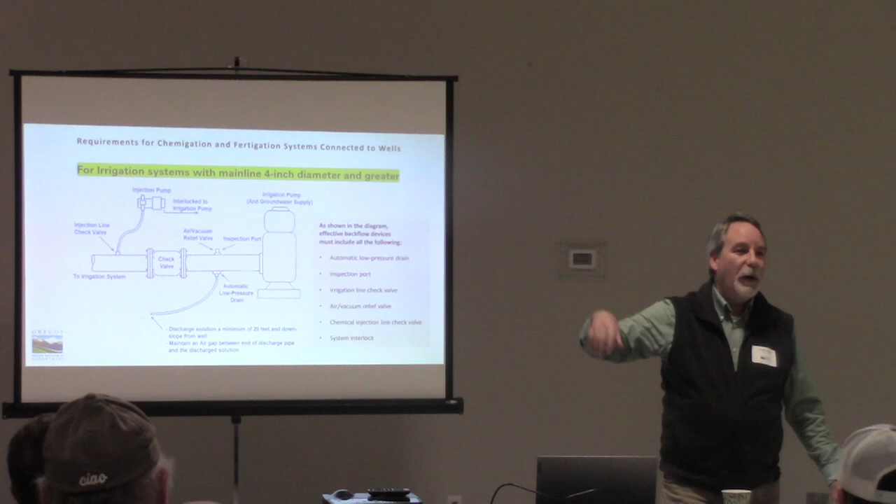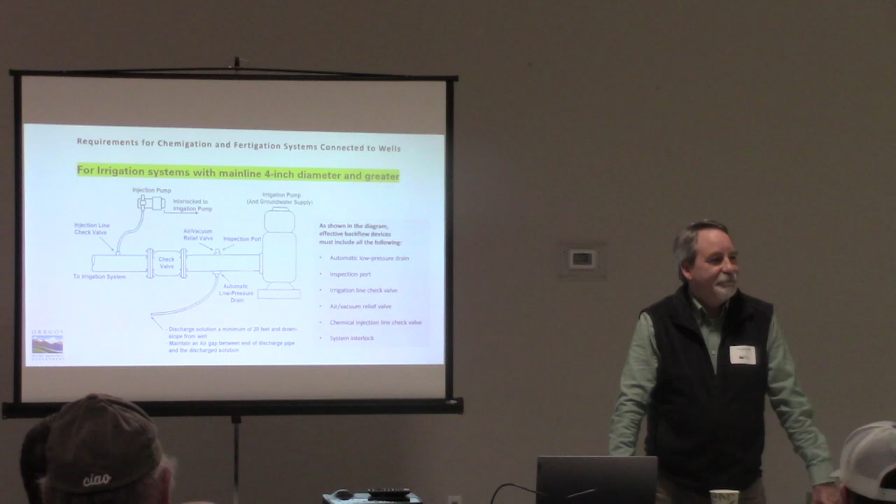Chris? That's a really good question, and I know many of you have met Tessa when you came in, so we don't have everybody's contact information. We may have your address. We will make every attempt to make sure that you know that we are coming out to do this inspection. We can't promise every single person that we will make contact with you, because some people don't live on their property, or there are other issues that come up in trying to talk to people as we're going out there.

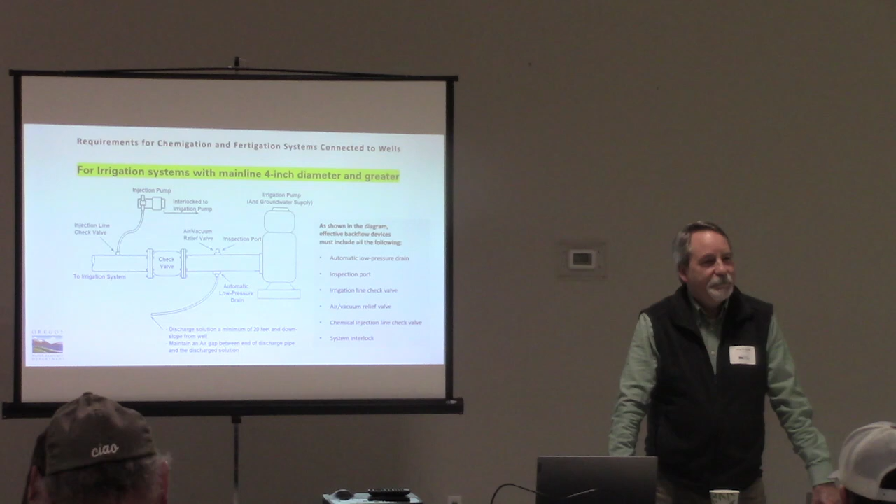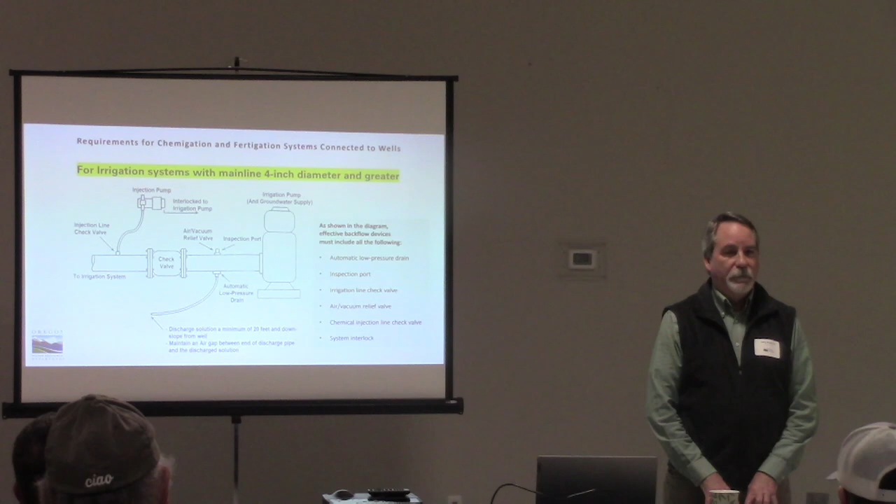And we have about 730 of these to do this year, so we're going to make every attempt to connect with people who are out there, because we want to understand how your system works and make sure we're all on the same page. That is our intent, but we can't guarantee it. We'll do our very best to make sure we do that. But there may be circumstances where we just have to go out and do an inspection. Everyone hear that okay?

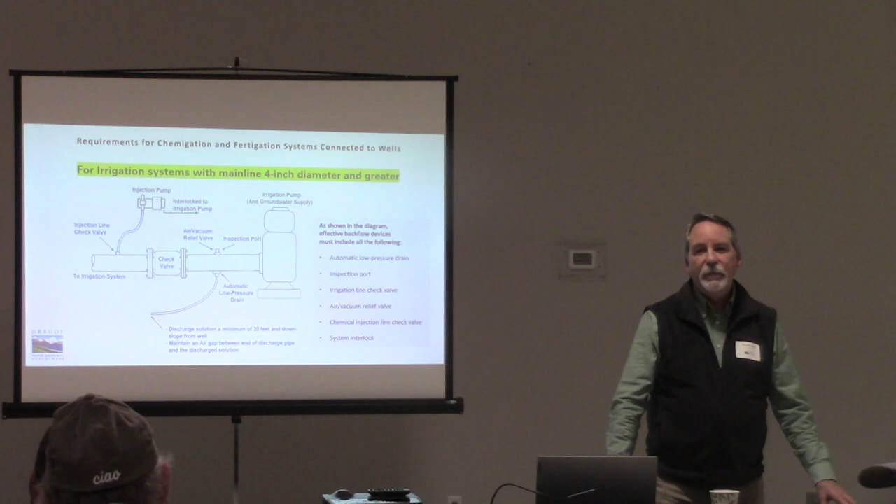I would just encourage, if you have not given your phone number, please do so. I've gotten a few of yours, and that's great. But like Chris said, we have no way of contacting you otherwise. Or if you know of some friends that are not here that might want to contact us, please have them contact our office with their most recent contact information, because some of the water rights are associated from about 30, 40 years ago and they may have moved on. And if you see a white truck, don't shoot.

Can we call you guys so you can meet with us? Absolutely, yeah, I'm happy to do that. Yes, we do. It's just my name on it. Let me bring that.

Other questions? So let me show you guys my system before I do something to it. Any of our irrigation specialists, engineers, etc., want to add anything they have missed? Is there something folks here need to hear that we haven't talked about tonight?